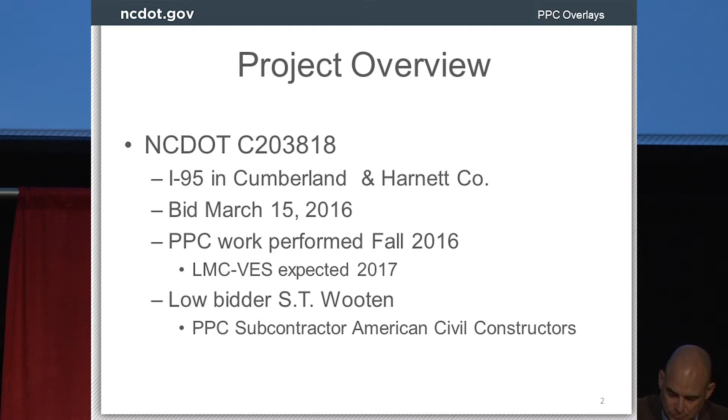I guess Dan had met Merritt a couple of years ago at a conference, and we had some interest in that, and so we kind of vetted the product a little bit, contacted some other states that had used this before. I got in touch with Dick Dunn, and he got me in touch with some folks with New Jersey, and we talked to several states around and tried to figure out the benefits and the problems with using this material, and we came upon this project right here.

It's an interstate maintenance project in Cumberland and Harnett County, and in that project there's actually 5 bridges. 3 of the bridges are getting latex modified overlays, so they're getting hydro demoed and then latex modified. And then we're also doing the PPC on 2 of the projects in Harnett County. And we felt like it was a good opportunity to use PPC because we could do sort of a side-by-side comparison to see how things worked.

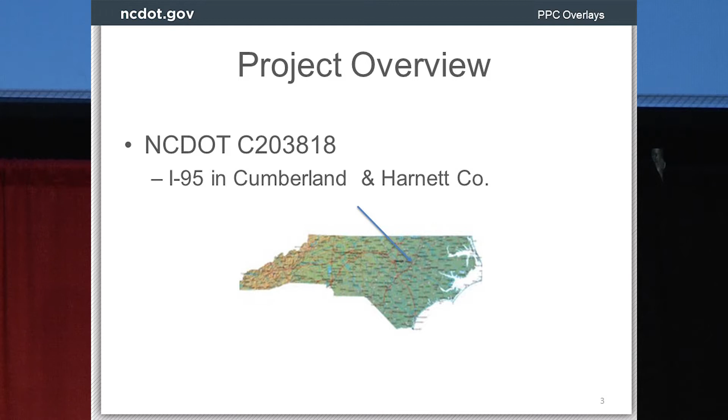And one of the great things about this project in particular, where we chose to do the PPC, it's on I-95 at the intersection of US 421. And there is a project about 8 or 10 years from now to redo this whole interchange, which would replace the bridges. So we knew if it didn't work out very well, we only had about 8 or 10 years we had to deal with it anyway.

So thanks for the confidence. Yes.

So anyway, that's kind of how this project, the specifics on the bridge just kind of lent themselves to trying the polyester polymer concrete, or the PPC. Just a few things about the project you can see there. You can see the location is on I-95 there. It's about a third of the way down the state on I-95.

This particular area does not get a lot of salt and brine treatment. It gets a little bit, but not that much. Really farther west from there, north and west, gets more. And so we weren't too concerned about a lot of chloride infiltration on the deck, even though it did have an asphalt wearing surface.

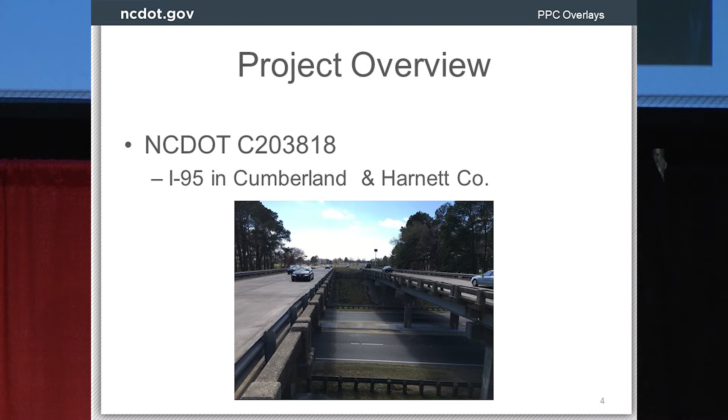Here's a picture of the dual structures. Nothing special, nothing crazy or outlandish about these bridges. These are just kind of workhorse bridges. I think they're 4-span bridges, maybe about 200 feet long. Again, nothing special about them, nothing unusual.

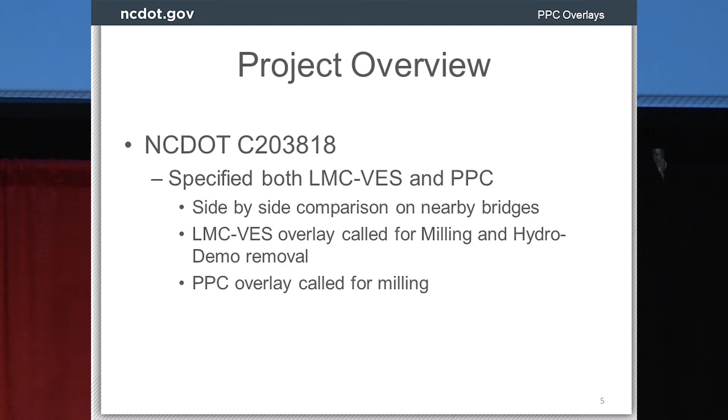Again, as I talked about, we like this idea because it had sort of a side-by-side comparison about what we could do on these bridges between the LMC and the PPC. The LMC, again, called for scarification and hydro demolition. That's what we typically do in North Carolina for our latex modified projects. The PPC called for milling and then the usual shot blasting to prepare the surface. I'll let Merritt talk a little bit.

Thanks. PPC is made up like a regular concrete, only instead of rock and sand and cement, you have rock and sand and plastic, but it's still mixed similarly to concrete and placed similarly to concrete. Some additional features are that it has a

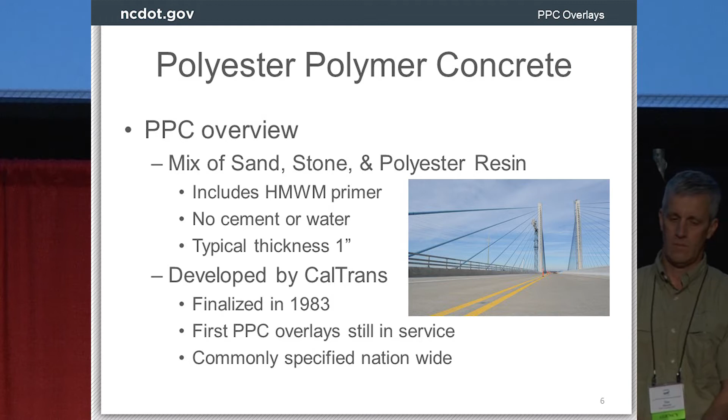high molecular weight methacrylate primer coat that goes down before the overlay material. What this means is that it has an integral bond with the substrate, so it's a liquid chemical primer that saturates the top surface of that concrete, then reacts with the overlay, so that basically the overlay is acting as a composite with the deck and cannot be removed without getting into the concrete. So in order to stay put for the life of the overlay, that's a big key to the success.

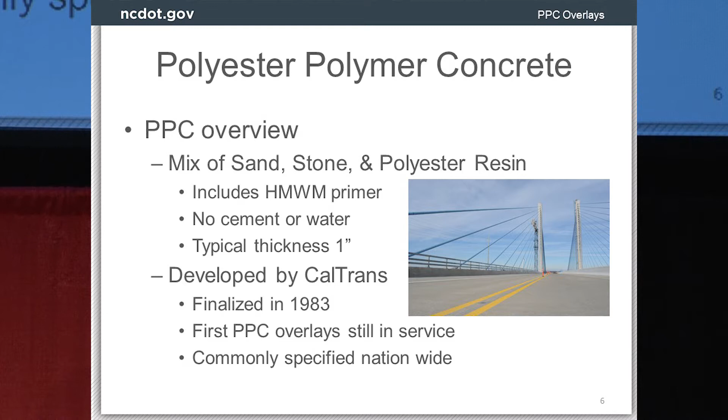No cement or water, so we're off to some more non-traditional materials, but that gives us other features. Typical 1-inch thickness, which we were very close to on this job. Caltrans, California Department of Transportation, developed this material. With some industry partnerships, they came up with this material. They started researching it actually in the late 60s, but really finalized their design in 1983.

And the design has not changed since. Some of the properties, this is what we get from using plastic instead of cement. We have impermeable to moisture and chlorides. It's zero permeability. So we're all talking about brine and rock salt, that kind of thing. They just don't get through it. They just sit on top of it.

It's made of plastic. Wise man in the front row once referred to the brine that we put on bridges as liquid bridge remover. And it stuck. It stuck to me. And I think the name of the game is keeping that out, or at least not letting it take effect. You've got epoxy rebar here. You've got different types of concretes. Our version of it is to put something on the top that does not let that into the bridge deck.

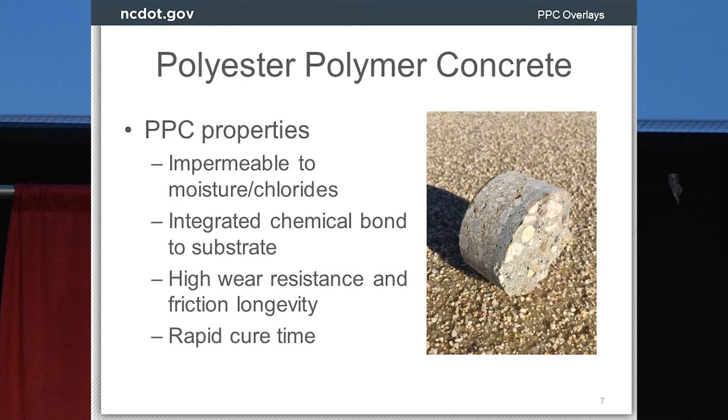The primer bleeding in gives you that integrated chemical bond. That means it can't be removed. That means it actually stays with the bridge for the life of the overlay. Very strong, high wear resistance, so you have good friction for the life of the overlay. That never drops. Other feature that tends to get us a lot of our work is that we return traffic 2 hours after placement. So not just rapid cure time, but very fast. So the majority of our work happens at night, very quickly, very fast traffic return.

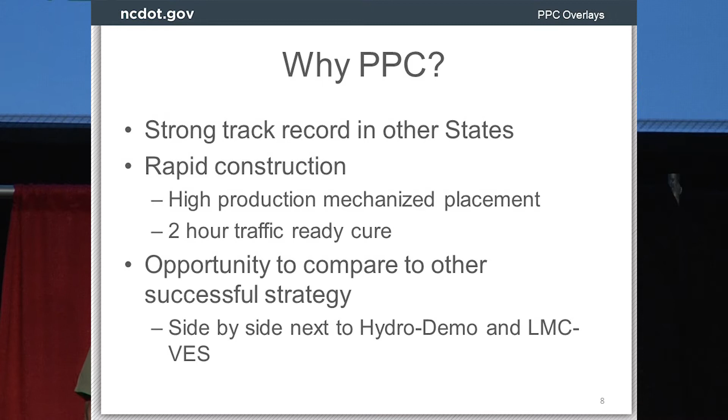Why would they do this? Truthfully, and you see it kind of down in the bottom there, hydrodemo and latex is successful. They've had a great track record with it in North Carolina. But so does this. PPC has a strong track record in other states, tends to be popular, seemed to be worth trying. I think the other thing is that rapid 2-hour traffic return. So all the work can happen at night without any disruption to daytime traffic.

Why else would you do it? You've got a deck that's worth preserving. Many decks are. Some decks are too far gone, but many decks are worth preserving. This gives you a way to rehabilitate and preserve that deck so that you get the life out of it that you want. Often decks that are in at least fair to good condition, 5 or above, can be treated with PPC and get another 30 plus years out of them.

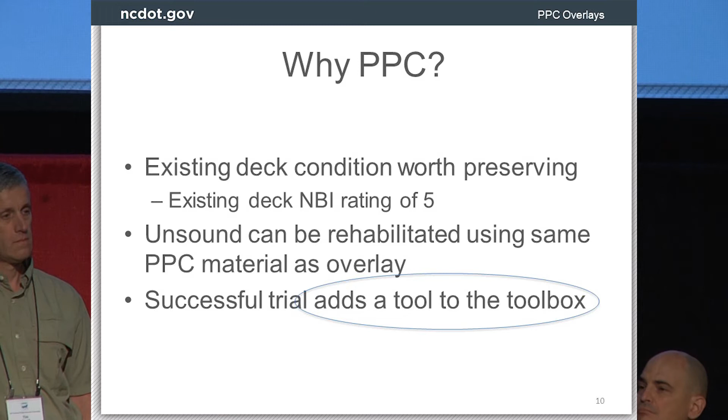You can also use that material to patch the deck, which allows you to use one material with similar properties to the overlay on the project to rehabilitate the deck, which means fewer different materials within it, fewer different properties. You have those interfaces of different properties, those always lead to problems. So this is one material, one set of properties right up through. And a successful track record. I think they deserve to have another tool in the toolbox. Wanted to try this. So I circled it.

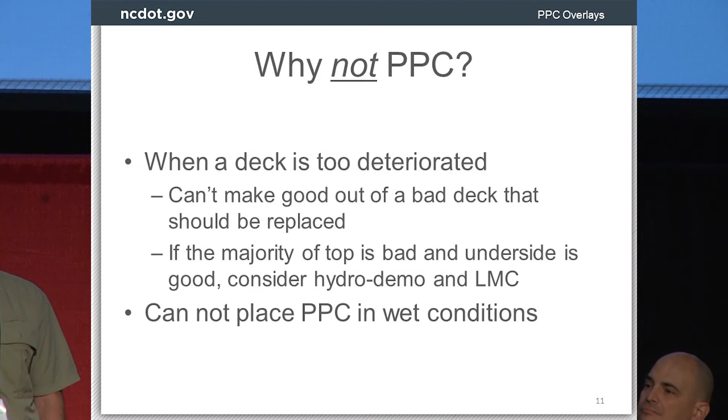Why not? To be honest, things don't work everywhere. Everything has its faults. If a deck is too deteriorated, if it's too far gone for anything, this isn't going to work. That's the fact. If a deck needs to be replaced, you should replace it. My mantra, my big recommendation for everything: understand your problems and fix them. So, the Band-Aid for a shotgun wound, that kind of a thing. Don't try and do something that is rehabilitation or preservation when you need replacement. Let's not fool around with that.

The other side to it is don't do too much. Maybe this fits in somewhere in between. They're doing hydrodemolition and latex modified concrete. Look at the second bullet there. If the majority of the top is bad and the underside is good, you've got a golden opportunity for hydro and latex, and it's going to be successful. It's going to work. That's not a time to use this. We may have something to offer for that, but we're probably not going to be economical.

So understand your problems and fix them. Don't do more and don't do less. Don't put sealer on a deck that needs an overlay, and don't put an overlay on a deck that needs to be replaced. This is another tool for the toolbox. I think North Carolina came out with a good understanding of where this fits, and will continue that understanding. Why not use PPC? You can't do it in wet conditions.

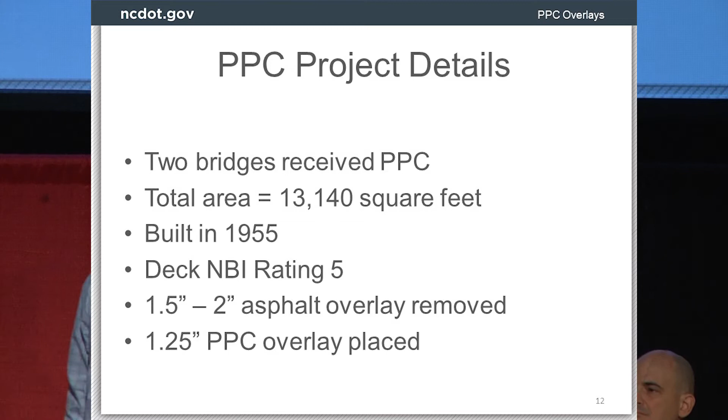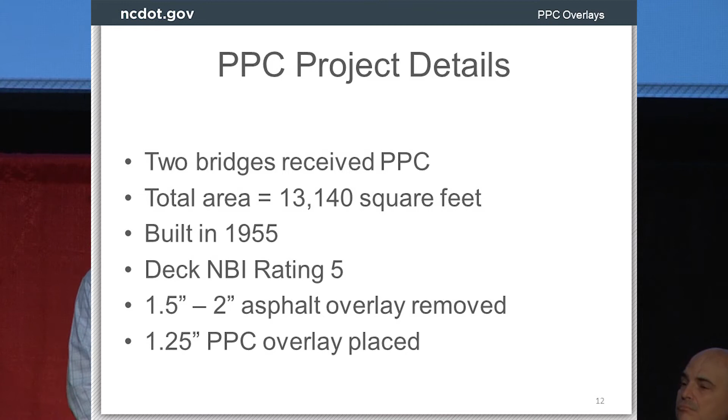So yeah, just a little more background on the specifics on these two bridges that we chose. You can see the total area between the two bridges, about 13,000 square feet. Both of these bridges built in 1955, so they've been around for 60 plus years. The decks are in pretty good shape. NBI rating of 5, not super great, but not awful. They had asphalt wearing surface on the bridge at the time we were starting the project. We ended up milling all that off and coming back with 1.25 inches of the PPC overlay.

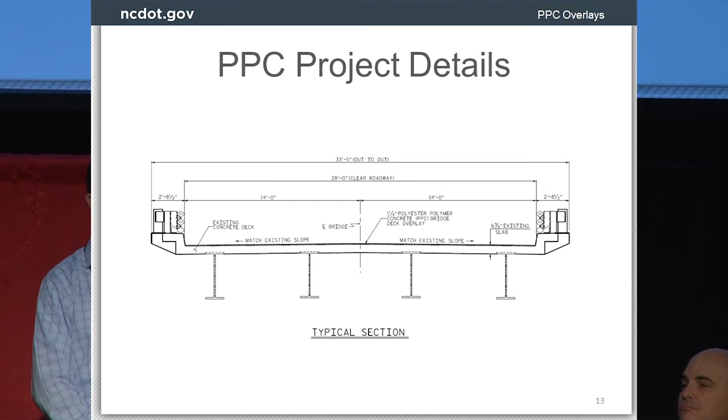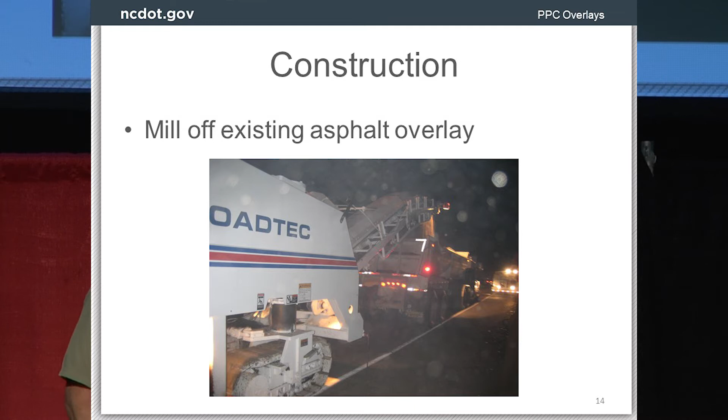That's just a typical section of the bridge there. 28-foot clear width, 4 girder system there. This is milling off the existing overlay. Everybody should be able to recognize that. The idea is to get to the concrete substrate, get all the asphalt off, get all the membrane off. You need all that removed. We need concrete substrate.

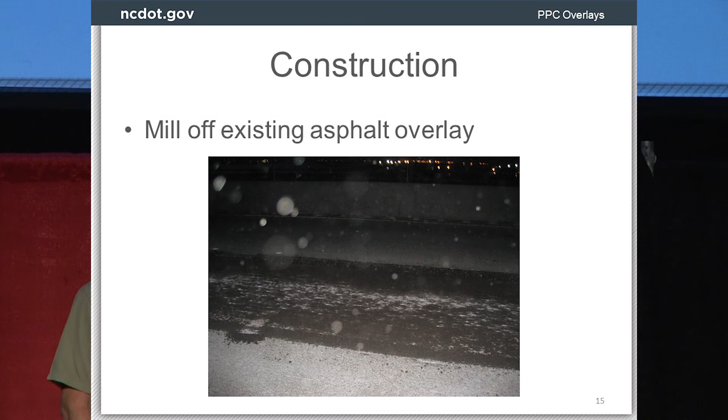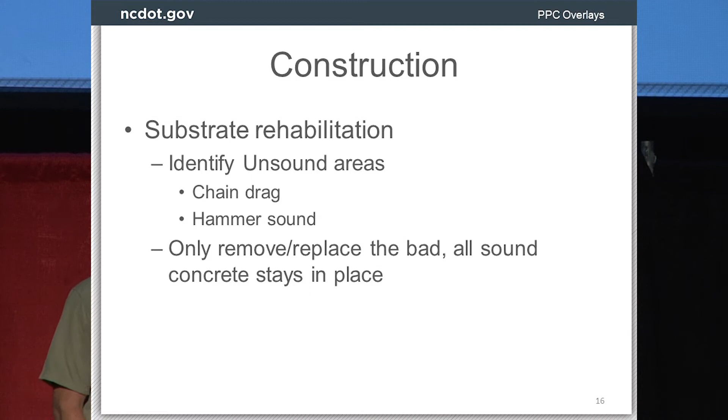Next thing to do, identify unsound areas. So chain drag, hammer sound, this is all the stuff that we're used to. One of the big ideas here is, as this compares to the bridges that they're going to do on the other part of the project, only remove the bad concrete, don't go beyond that. Besides the milling off of the asphalt, we're not removing any prescribed section of the top of the deck. We're just taking out the asphalt, and then you sound it to remove the bad.

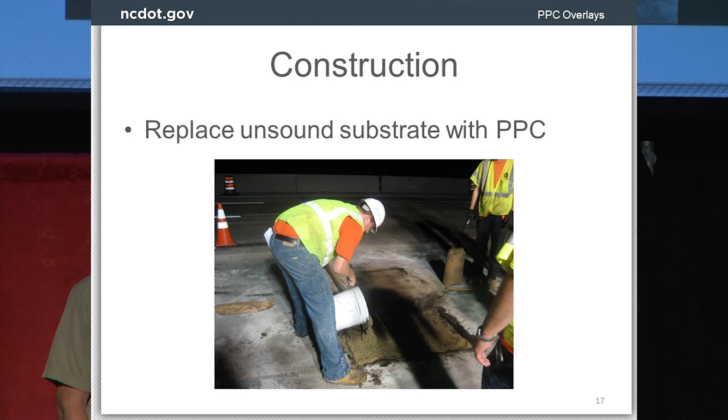We're not exposing the rebar. We're not taking out any good concrete. As long as it's good concrete, it can stay in place. Sound it, find the bad, take it out. Patching. Looks a lot like other patching, but now it's with PPC as the patching material. Shot blasting the surface.

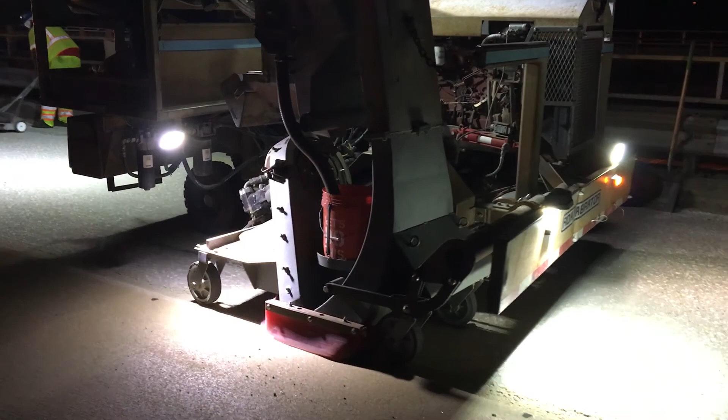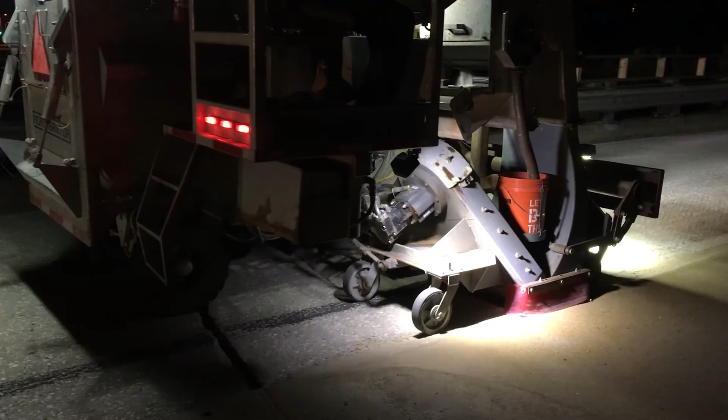What this does, after milling, this is basically like a heavy sandblast, but it uses steel shot. It vacuums itself up and then can be followed up with a magnet to get any steel shot that's left, and then you blow it off with a compressor. The part of it that's really great is it's almost like a very aggressive sandblast, very uniform in its approach on the surface, and does a nice wide area of clean.

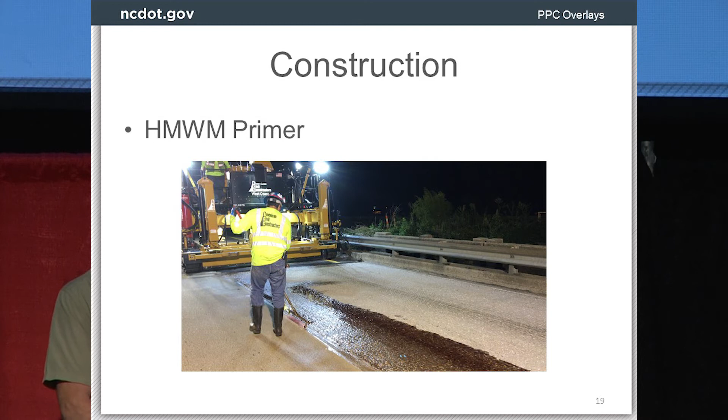And because it vacuums itself up, it actually pulls in the shot blast dust, which is what it's removing, and pulls it into a hopper and can be dumped off-site. So you don't make a huge mess out of things. It's very efficient too. Primer, I mentioned that methacrylate primer. Really high-tech installation methods. The guy rolls it on with a paint roller after dumping it out of a bucket.

What it's ending up doing, though, is filling the pores in the top of that concrete, saturating it. Cracks, small cracks, big cracks, any cracks, it's going to fill those in by gravity feed because you're pushing that puddle around, this excess liquid around. It's going to fill those cracks, bleed into that top surface of the concrete, saturate it, then react with the overlay.

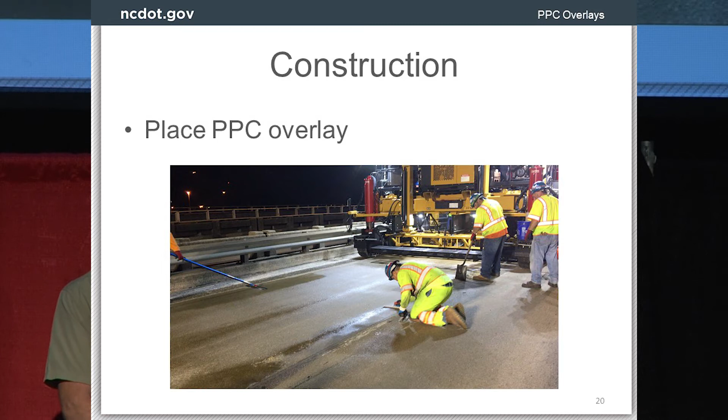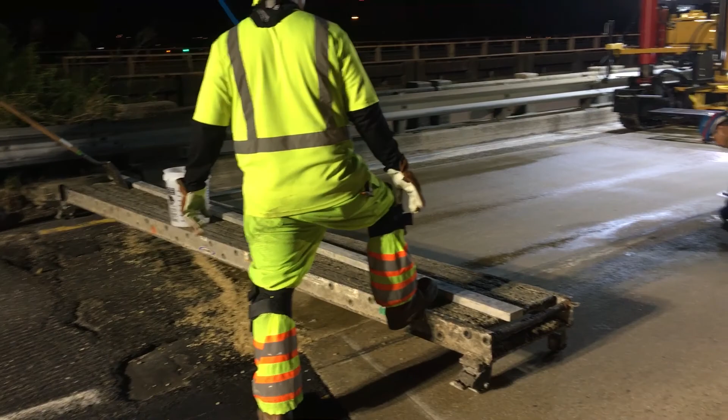This is a blend of super high-tech and not so high-tech. Notice they've got a slip-form paver putting the material down. In front of that is a mobile mixer truck making the material. Behind the paver is a guy with a float in his hand, a guy with a Fresno. It's a blend of high-tech and not so high-tech.

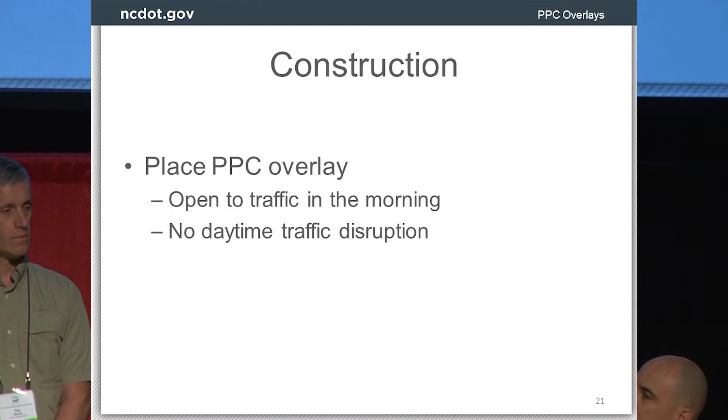Back to the features: open to traffic in the morning. Commuters and daytime traffic never knew that this work was going on. They just knew that one day it rode really bad, the next day it rode really well. No daytime traffic disruption. And here's what it looks like in the end with traffic on it. Looks like a bridge again.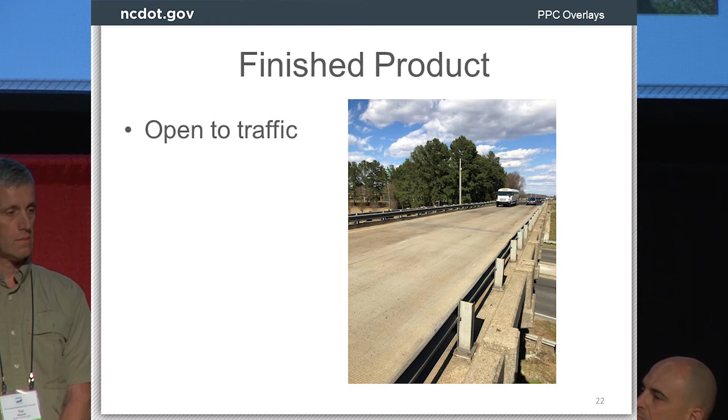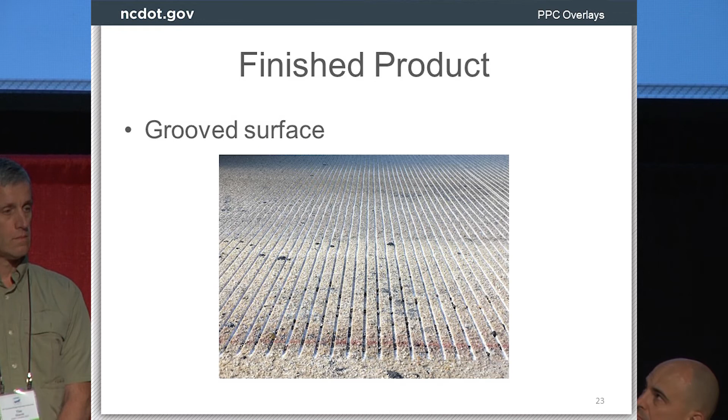They opted to saw cut groove this particular installation. You can also tine it. This one they opted to saw cut groove. Quieter ride, more uniform ride, still water dispersion and good friction. Should look familiar. Still looks like a bridge deck.

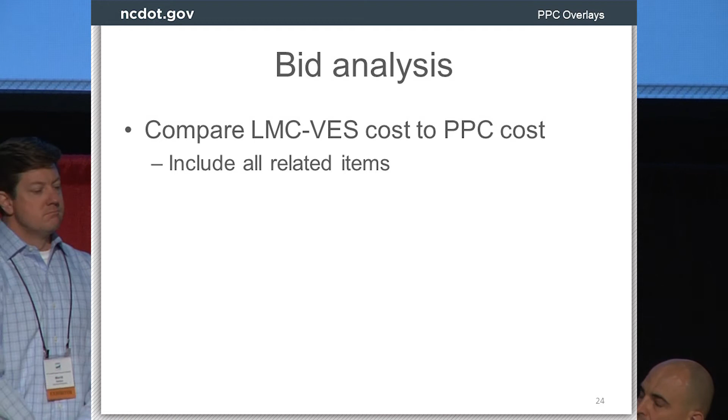We thought we'd put together a little cost information associated with the project, again, the LMC work as well as the PPC work. You can go down the list. We went through each one of the bid items associated with each part of the work, from the scarifying to the hydro demo, down to grooving

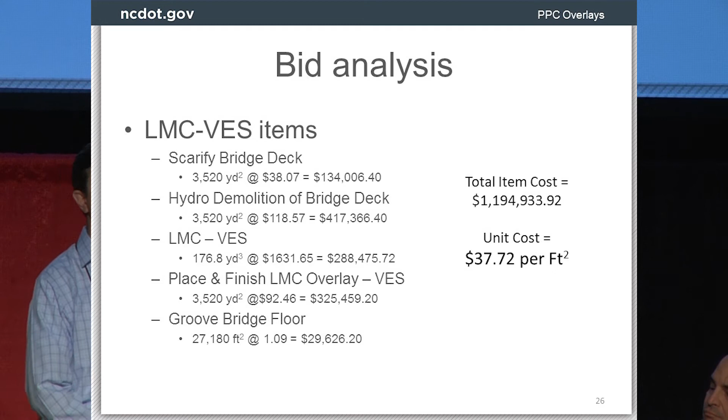the bridge floor. You can see about $37, $38 a square foot for the LMC and hydro demo, which is about right for our state. Our range is probably somewhere in the neighborhood of $35 to $40 a square foot. It varies depending on the conditions, but that number is about right for us.

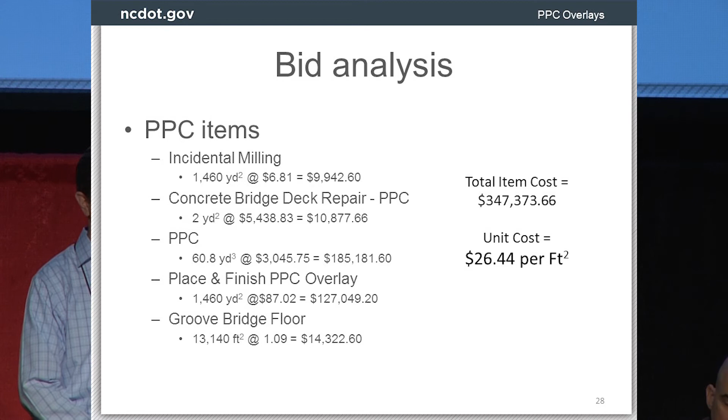And then here's the items we looked at for the PPC overlay: the milling, any deck repairs associated there, down to the grooving. And that's about $26 a square foot. That's a little bit higher than what I think the typical cost is for most places, but this was our first project that we had done.

We have since let a couple more projects with PPC. On one of the more recent ones, I think it's about $24 a square foot. And we expect as we do more and more work with the PPC, the cost will continue to drop for us.

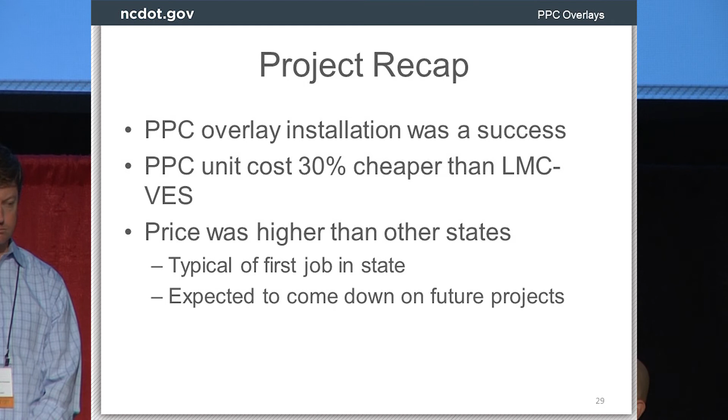Overall, the project was very much a success with the PPC. Again, the quick turnaround was a great help for us. It's obviously about 30% cheaper than LMC. Probably the biggest difference there is the hydro demo cost. And again, our cost for the PPC was a little bit higher than typical, but we expect it to come down as we do more and more of these PPC overlays.

You know, we're going to continue to monitor this PPC. The division engineer for this area drives across these bridges almost every day, so we're going to make sure that they are in good shape and this is working. Again, we've had several more projects that we've let, and the prices have been coming down on those. As Merritt said, this is just another tool in our toolbox.

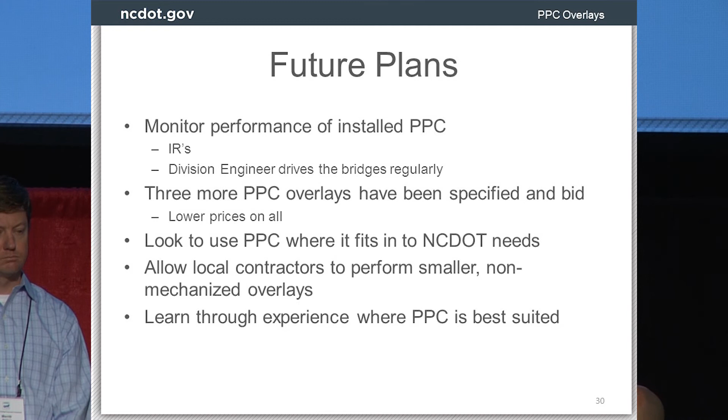We're not getting rid of LMC. We're not getting rid of epoxy overlays either. I mean, just as a test of how good LMC can be, on the three other bridges on this project, on two of those bridges, we're doing an LMC overlay. They were overlaid with LMC in 1984, and they've held up for obviously 33 years. So, again, we're not getting rid of LMC.

One of the nice things again about the PPC, Merritt showed that on this job we used a paving machine to place this material. On some of these smaller projects, really on this project, it could have been done with a screed, with more of your typical concrete placement methods. So we think that is going to be a help for some of our smaller contractors as we move forward and do more and more of this type of work. So we're learning, we're figuring out the best projects, the best places to use the PPC. Any questions?

Hi, Tim. Great presentation. One quick question I have is, when you have the cold joint between the two layers, how does that work when you're putting different lanes or whatnot? Oh, so the joint between the two pours of the PPC. Right. I'm gonna let Merritt talk to that. It sticks to itself like crazy. Okay. So there's no line or anything. No issue.